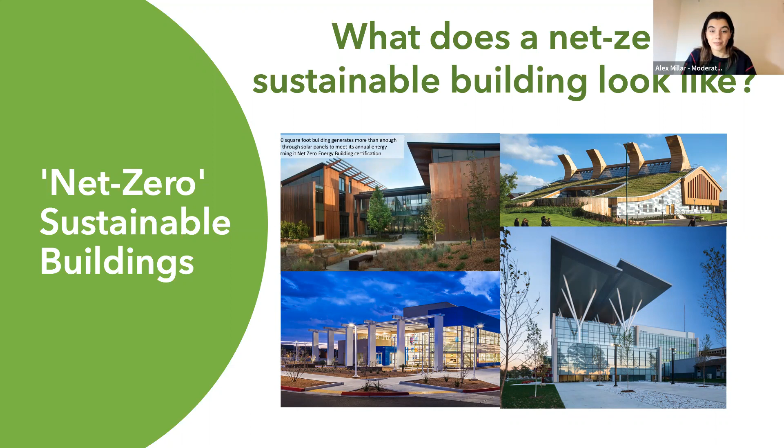But by choosing to demolish some of our older buildings on the grounds that they no longer meet our current needs, we are failing to embed more circular practices, which could reduce the amount of waste generated through the effective reuse or recycling of existing building materials.

In making such choices, we should consider the amount of embodied energy already contained within these existing structures and the historic emissions already released through the process of designing, building, restoring, and maintaining those assets. We need to think about the energy consumed as new materials are manufactured, distributed, sold, transported, and then assembled.

Can they be sourced locally, regionally, provincially? Can they be sustainably sourced? Some developers are taking this to the next level by choosing to deconstruct rather than demolish existing buildings.

This can involve taking buildings apart piece by piece and avoiding damage by carefully extracting what is required. By taking such an approach, we can not only save on purchasing new materials, but positively reduce the amount of materials, noise, nuisance, and dust associated with more traditional demolition and reconstruction methods.

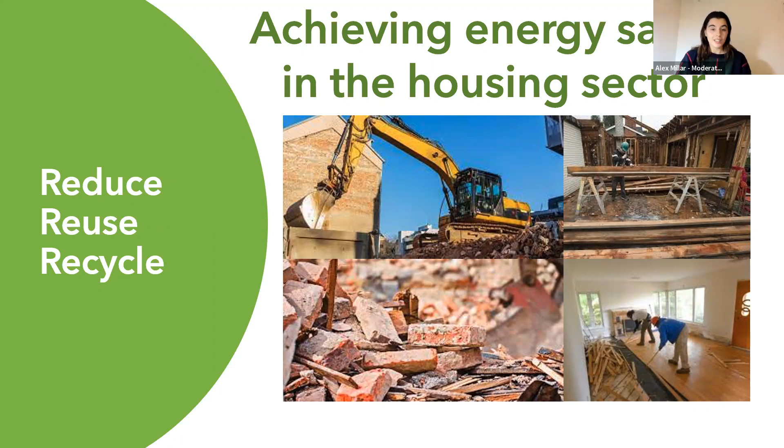As we continue our conversations on how to achieve that goal of net zero emissions by 2050, we will also need to determine what actions we can all take in our own homes to increase energy efficiencies. And that's kind of where Rethink Green can help.

As mentioned earlier, Rethink Green will soon be launching our new Northern Home Energy Assessments program. We recently hired a new staff member who's currently training as a registered energy advisor to provide home energy assessments in Greater Sudbury, North Bay, and beyond. The training process is extensive, but our energy advisor will soon be ready to deliver home energy assessments to EnerGuide standards, allowing households registered in the program to potentially access government grants, incentives, and other rebates.

These can be used for a range of purposes, including renovations, improved home energy efficiencies, and ensuring that our older buildings stay resilient to the effects of climate change.

The process for applicants will include getting registered with Natural Resources Canada, then booking and receiving your initial assessment. Our energy advisor will come to your house and determine the exact amount of energy your home is consuming. This is commonly referred to as a baseline assessment.

The energy advisor will then draft up a report outlining your home's current energy use and make a list of recommendations for improvements. They will also provide estimates for how impactful the recommended improvements will be, in the form of percentages.

The homeowner will then complete the renovations, and they must make sure that they keep all those receipts, because they're going to come in handy.

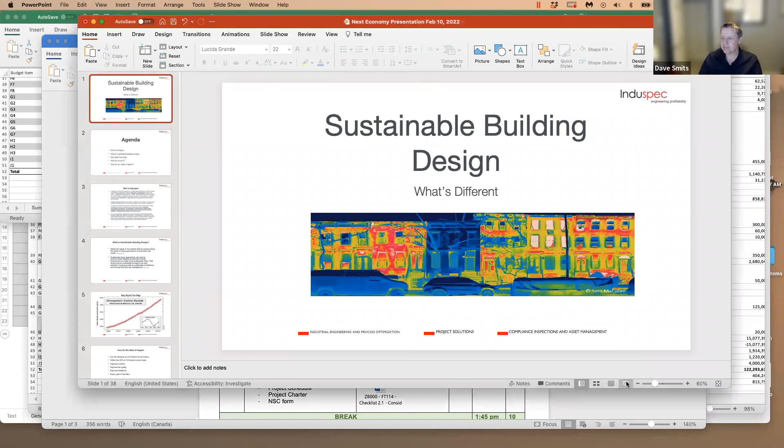Okay, we're all set. Thank you so much for that introduction, and I really appreciate your reference to existing buildings. This first slide: sustainable building design, what's different?

So when you look at this picture, this is a thermographic image of 6 buildings, brownstones in New York City. The one that seems darker than all of the rest is one that has had a deep energy efficient retrofit completed on it a few years ago. The ones where you see all the yellows and reds, that's heat loss, where the heat is being wasted in those buildings. The building that's blue shows how, through the renovation activity and improvements made, much of an improvement could be achieved. Visuals are often very powerful in explaining what can be accomplished. That's what's different when we talk about improving buildings.

In my presentation, I'm going to talk a fair bit about new construction, but a lot of what I'm talking about is absolutely applicable to renovation projects as well. Passive House has a deep energy retrofit, the EnerPHit program, targeted at renovations, because we cannot replace all the buildings we currently have, nor should we, for the reasons Alex already talked about.

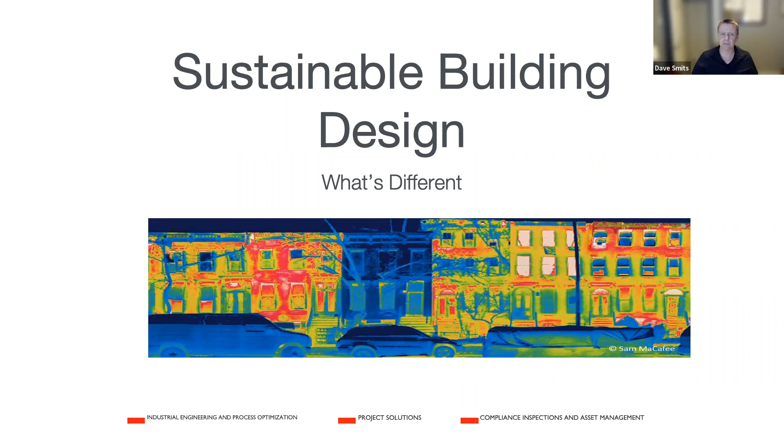So quickly, an agenda: who's Induspec? I'm going to do a little plug for the company at the beginning. What is sustainable building design? Just a couple of definitions - why we should build this way when building new, but also why we should renovate this way, which I think is completely applicable. How do we do it? What's the approach, how do we make it happen? That's another piece of the puzzle.

And at the end I will talk about the embodied carbon issue, because it's not just about using less energy in the buildings we either have now or have in the future, but we also have to think about what we're building these buildings out of. As Alex said, we've got to reuse the buildings we already have to the greatest extent possible, because the production of building materials is a large source of carbon, but I will get into that a little later as well.

So just Induspec, we've been around since 2010. I've been with the organization 5 years now. Our motto is sort of boots on the ground. Myself and the other engineers in our office like to not only provide the analysis and reports for our customers, but we actually want to see those reports implemented and ensure their projects are completed. So we spend a fair bit of time providing on-site support to our customers. We try to distinguish ourselves by that hands-on approach and on-site approach.

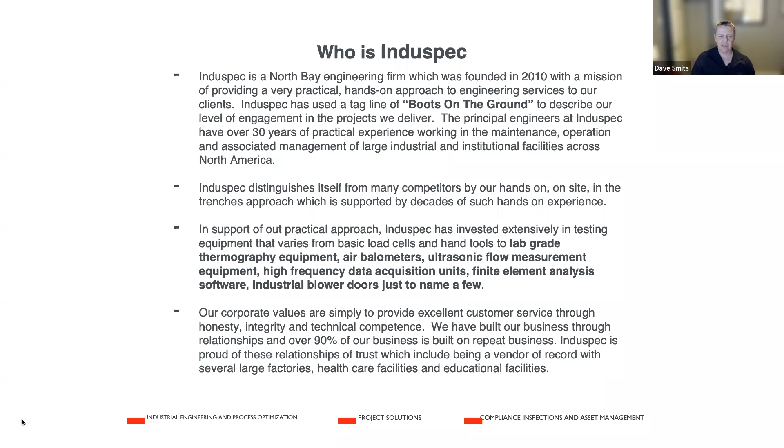So we have that kind of equipment and use it to help solve problems for our customers. A big chunk of our work is based on repeat business, so we thankfully can develop relationships with our customers and get to continue serving them going forward.

Sustainable building design, I pulled a couple definitions. It meets the needs of the present without compromising the ability of future generations to meet their own needs. To me, that's a pretty fundamental definition of sustainability. Sustainable living approaches can reduce environmental impacts by altering the built environment to create more sustainable cities. That would include sustainable transport, zero emissions housing, as well as sustainable architecture and circular flow land use management.

That's kind of a fancy word for what Rod Bills was presenting on a few weeks ago in terms of how do you revitalize your cities, how do you create healthy cities, and what does that look like, as opposed to continually expanding and building new subdivisions. How do you do effective infill and really create vibrant communities with walkable spaces and those sorts of amenities?

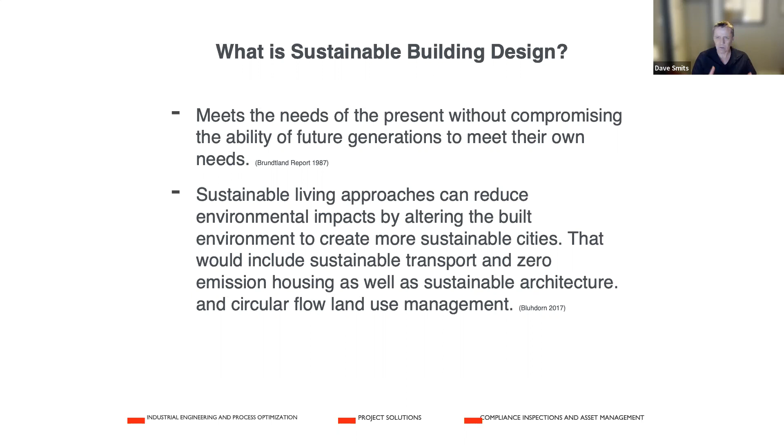So over the last 3 weeks leading up till today, I think many of the issues that support sustainability we've already heard about, with our kickoff presentation providing a broad view of what actions various municipalities are taking to move forward, Rod's presentation on how to make a vibrant city and how to help it be sustainable, and then last week looking at transportation options and opportunities. I think we've been building on this theme all the way through the speaker series.

I just pulled some stats in preparing for the presentation, from the period of 1990 through 2017, and this is from NRCan, so a reputable source, energy efficiency in residential buildings in Canada improved by 30%. So 27 years, 30%, a little bit over 1% a year. I'm not sure if anybody other than me thinks that at that rate, we're not going to solve our problem and be able to hit 1.5 degrees if we're going at 1% a year in terms of improvements. It just doesn't seem at a rate that's anywhere near aggressive enough.

Is that really a path to sustainability? I think that's why things like Passive House and these deep retrofits and net zero have become part of the conversations we need to have, because our current rate of performance improvement is inadequate. It's not going to do it.

And I guess today in Ontario particularly, maybe not in Toronto because some of the standards are different, but in much of Ontario, you go to build a new home and you ask the home builder, well, how much is it going to cost me to heat it? Or what my utility bills will be?

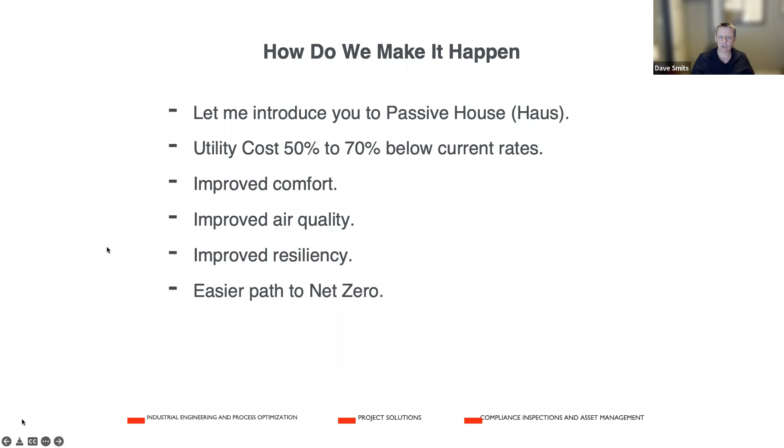And then it follows with testing during construction. As you build this building, you actually test it to confirm that it's going to perform the way you expect, and you're going to get those advantages in terms of comfort and air quality reliably. It also makes the path to net zero much easier, because if we reduce the amount of energy these buildings need by 70 or 80%, think about how small a solar system you need to actually be net zero at that point. So it all lends itself towards sustainability.

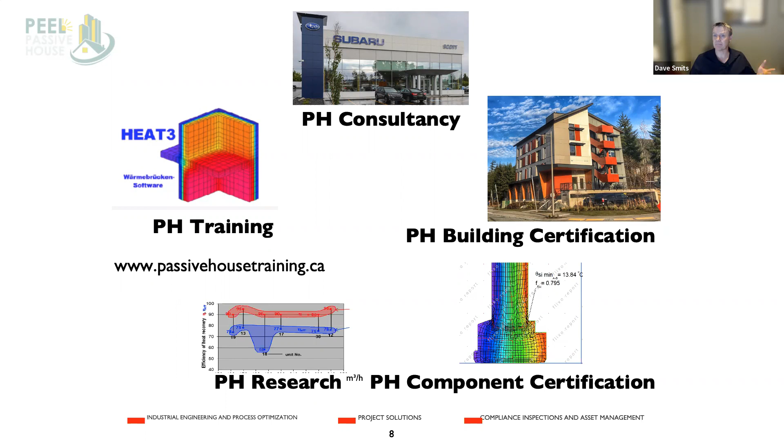This is some of what he does: the Passive House Consultancy, he does training, certification, research. He's probably one of the top minds in the province, if not the country, as it relates to Passive House. The one picture here above Passive House Consultancy, he's actually certified a Subaru dealership in Alberta to Passive House standards. House, in German, means building, it's not a house. So this isn't just about residential construction, this is about all types of construction. He's actually built and certified a car dealership, just to put it into context.

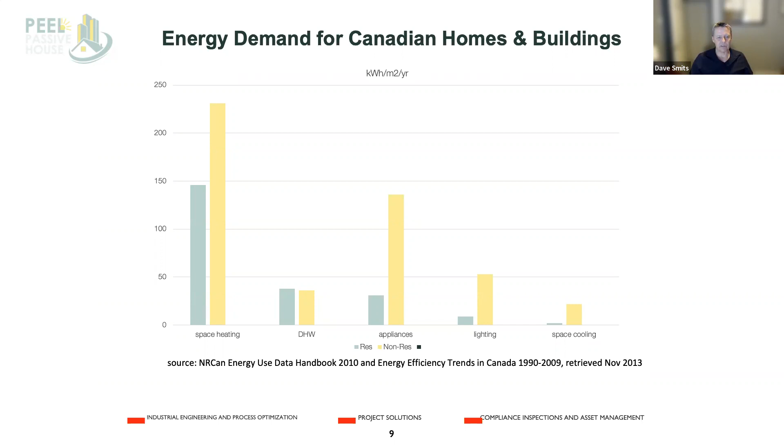So again, energy demand for Canadian homes and buildings, just touching on this again. This is some data that goes back to 2013. It hasn't improved dramatically, as I said earlier, 1% a year, so the data isn't going to be much different on this slide deck. But you can see that with Passive House, when you add in where we'd be performing in comparison to these other bars, the space heating bar chart is dramatic.

This kind of improvement now makes net zero so much easier to accomplish. Domestic hot water, there are improvements because we think more carefully about the hot water system and design it more efficiently. Appliances, we're selecting better quality, Energy Star certified appliances. Lighting, again, optimizing lighting using better techniques, and space cooling is also done more efficiently. But when you think about Canada and energy consumption, this is the one I hope catches your attention.

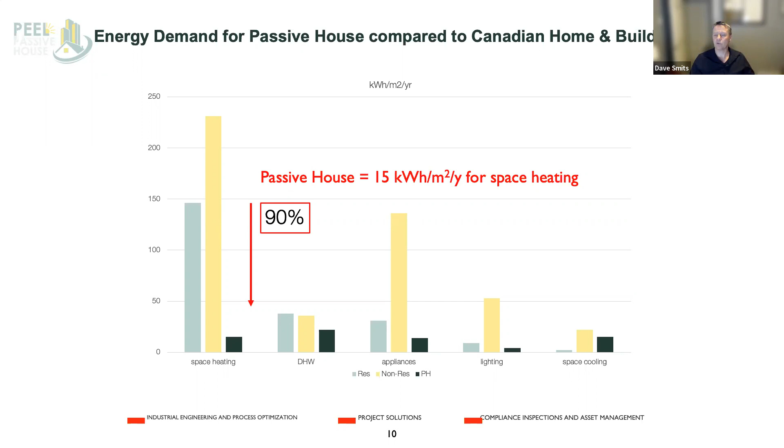That amount of decline, 15 kilowatt hours per meter squared per year, that's the target for Passive House. So to be certified in a certified project, you will be at or below that target. That's a 90% reduction. I've talked 50 to 70 because I like to be conservative, but many projects are accomplishing 90% over building code sort of buildings.

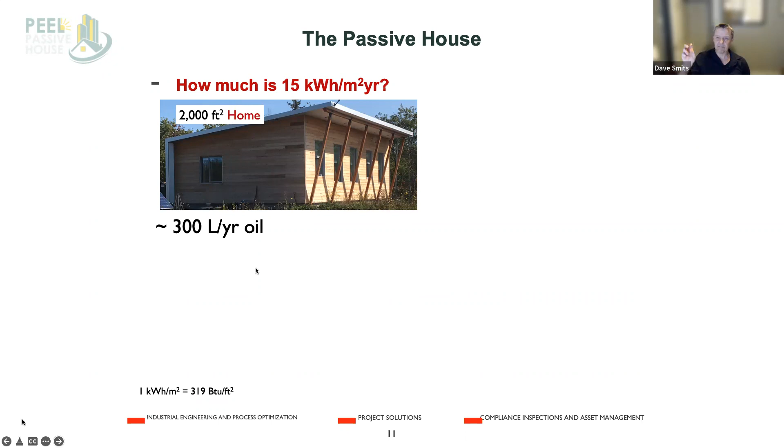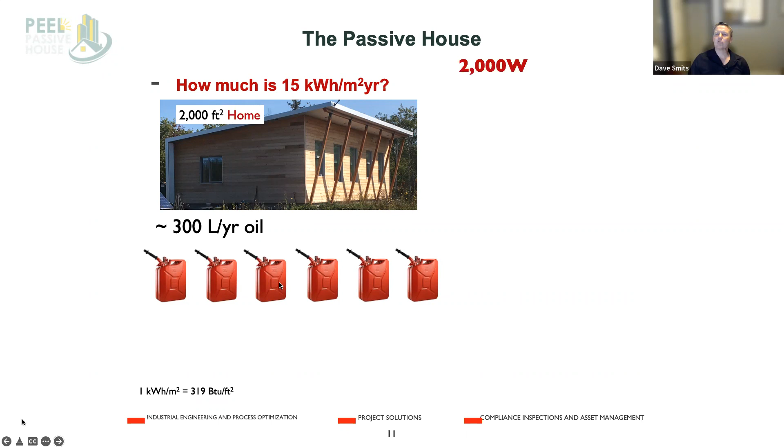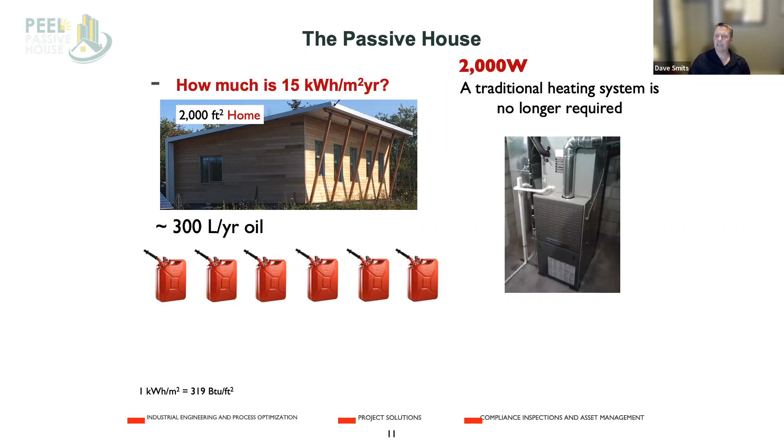So we're talking 2,000 watts now in a Passive House home of similar size. A traditional heating system is no longer required - you're not going to put a traditional furnace in a Passive House, it's not necessary, it's overkill. You could basically heat it with a big hair dryer. With effective design, really thorough planning, thinking about where your sun is - and I'll talk more about those considerations later - this is the kind of performance improvement we're talking about. I think it's pretty compelling that this is achievable and is being achieved in many parts of the world, and here in Canada now in a number of projects, which is great.

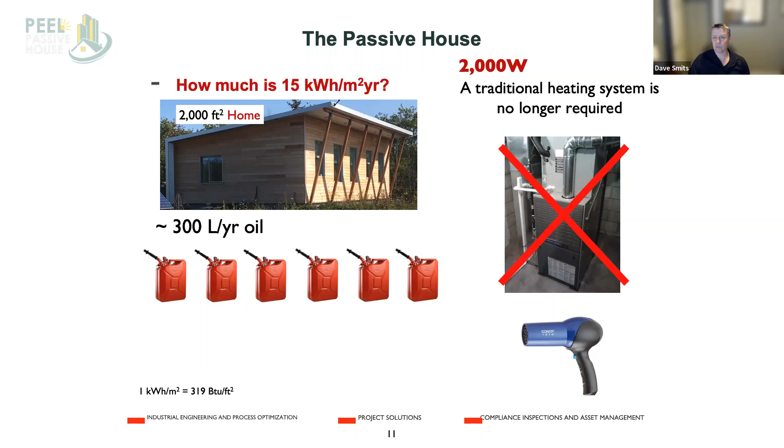We want to avoid thermal bridges. A thermal bridge is an area in your building where you end up with less insulation in a specific spot because of how the building is constructed - where, let's say, you've got a 2x6 constructed house today, but at the corners where the 2x6s meet you can't put insulation, or very little. Instead of an R24 in that corner, you might have an R5. Well, that corner is a thermal bridge. There are thermal bridges around your windows, and typically where your wall meets your roof.

The design practice with Passive House is we eliminate those thermal bridges to the greatest degree possible through effective planning. We pick good windows that have high performing glass and high performing frames, and we ensure that we've got an airtight envelope. Then last, we make sure that you can still breathe in this house, because if we've made it this tight, we've just moved you into a sealed water bottle, and without giving that building some air, it's not going to be very comfortable.

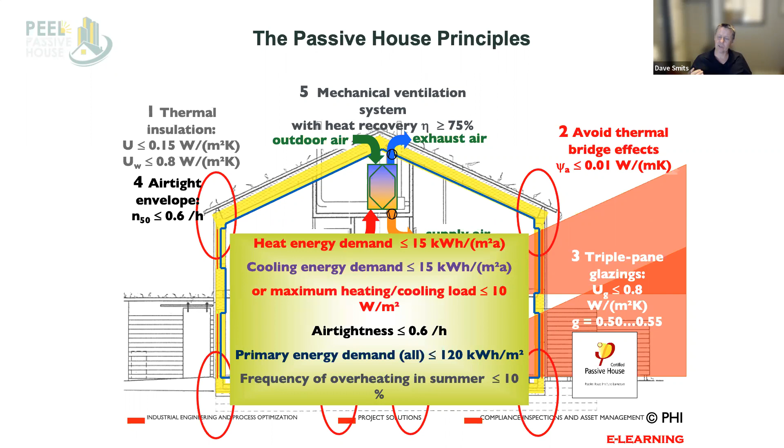Primary energy demand, all sources, has to be below a certain level - I'm not going to spend too much time on the technical stuff. And frequency of overheating in the summer has got to be less than 10% of the time. Why this is an issue: when you've made it this tight, if you get solar gain in the summer and you're not thinking about how you're shading your building, you can run into a situation where overheating becomes a problem. So you'll want to make sure you've taken that into account in your design and eliminate that risk from an overheating perspective.

So what's actually happening when we do this? In the 19th century, we built buildings and we put large furnaces in them, boilers, big stoves, whatever the case may be.

We went around with sweaters on, and that's sort of what our buildings were. The 20th century came along and we decided we could fix it all with technology. So we're going to have building automation systems, really fancy mechanical systems, really fancy heating systems. We're going to do all kinds of stuff. And that's what we did in the 20th century.

And we all see that at 1% a year, those approaches have been pretty much ineffective. It's been nominal improvement. In the 21st century, in a passive house, we actually spend the time paying attention to the building envelope itself, that part of the building that is so fundamental, we get it right. And then what happens is we actually have very simple and minimal mechanical systems, but we have a far superior building in terms of its comfort and its resiliency over time.

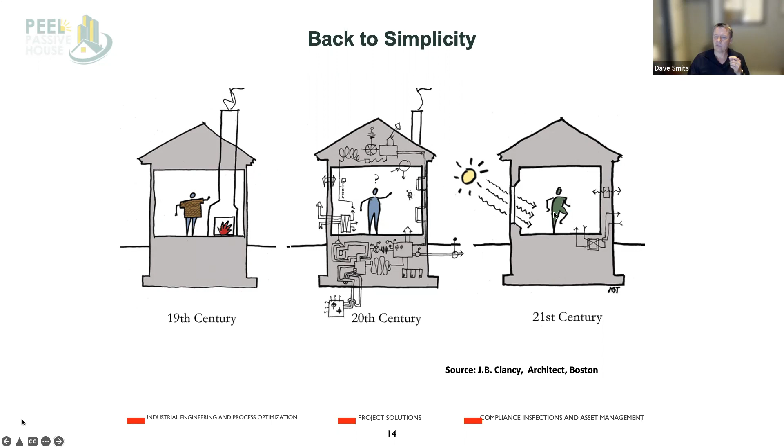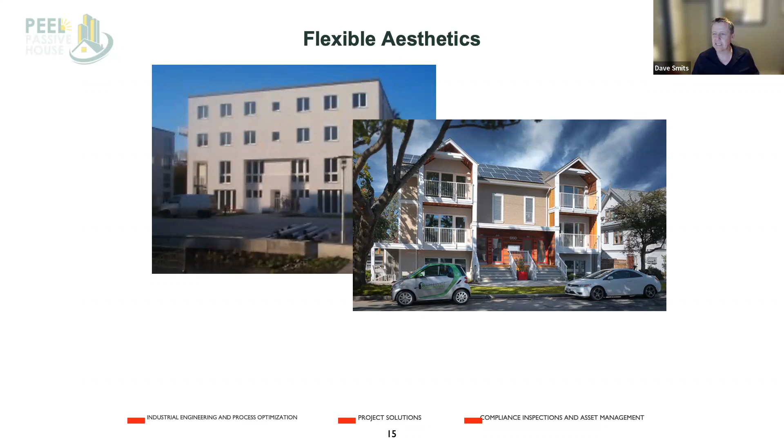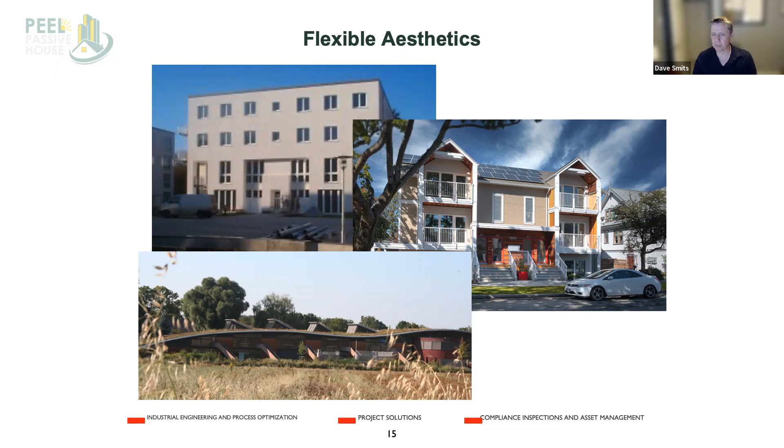Again, a little bit more on why passive house. So, superior indoor environment: air, thermal, and acoustic.

We know how much air we're getting because we're controlling the airflow, and we know what quality of air because we filter that air. So we've got a certainty around air quality that you don't have in your house today if all you're counting on is what leaks through the walls and windows in your building.

Thermally, the temperature in these buildings is very constant from room to room. It would be almost the same across any room in the building. And I'll talk a little bit more about not just the same from room to room, but in a room, also the same even as you get close to the outdoors and to the glass.

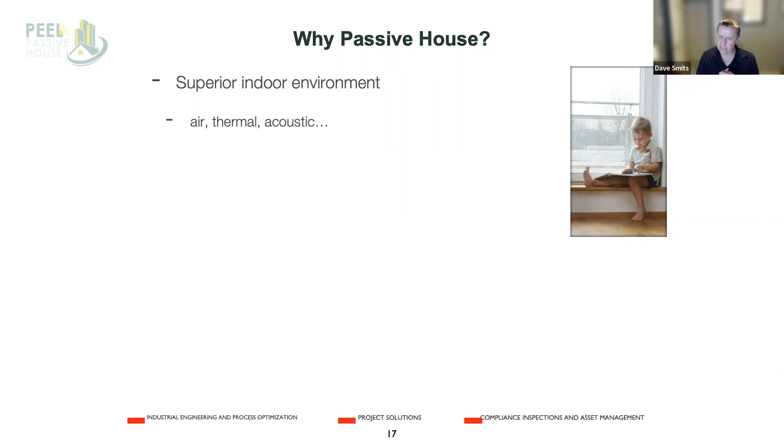Acoustically, these buildings tend to be extremely quiet because they are so well insulated and their windows are such good quality that if you're living in a busy neighborhood with lots of outdoor noise, the inside of your building is very, very quiet.

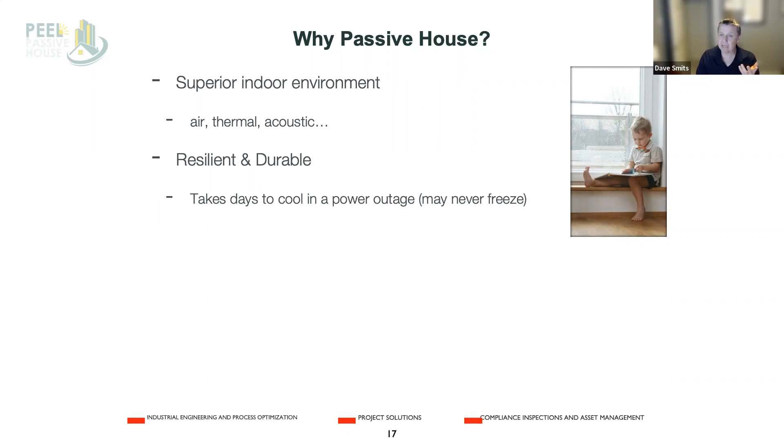Resilient and durable, I'm going to talk about a bit more. I've got some slides that talk about timeframes in terms of how long they'll survive with power out before you get down to temperatures that could be a problem. Depending on where you are, it can take days to cool in a power outage, and it may never freeze just because of the nature of how it's built.

25 years, this has been around for a long time. In other parts of the world it's been certainly accepted. Some countries have made this their building code in terms of energy. We haven't gotten that far yet in North America because energy has traditionally been cheap, but obviously that's changing.

It's accepted and sought by occupants in many parts of the world. It delivers true greenhouse gas emission reductions, and it's backed by robust third-party quality assurance processes. So the certification of these buildings, if people take it to that extent, gives you that assurance that the building will perform the way you expect it to perform. That's the advantage of certification.

It works in any and every naturally inhabited climate. So this isn't just for warm or moderate climates or super cold climates. Based on the design principles, it can be made to work anywhere in the world, and it does today.

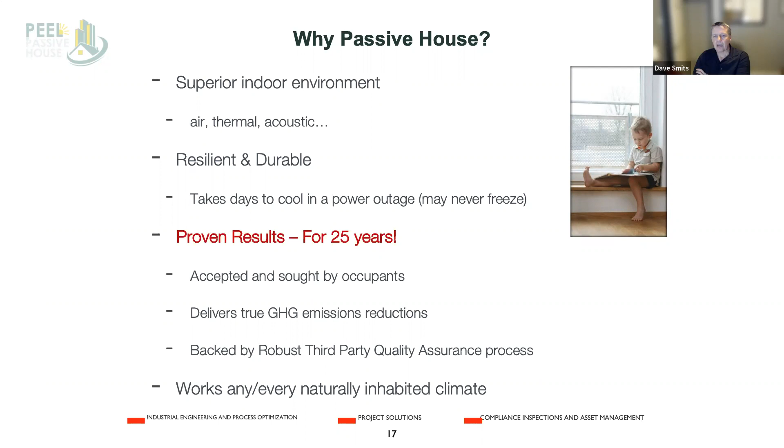I'm going to talk a little bit more about comfort. One of the issues, I think—I live in an early 1960s house here in the city of North Bay, and I've done lots of renovations over the years, but I can tell you when it was 30 below a few weeks ago, if you go and stand close to your window, you often will find it quite chilly, because the actual temperature in front of that window is quite a bit different than it is in the balance of the room, often 4 or 5 degrees different.

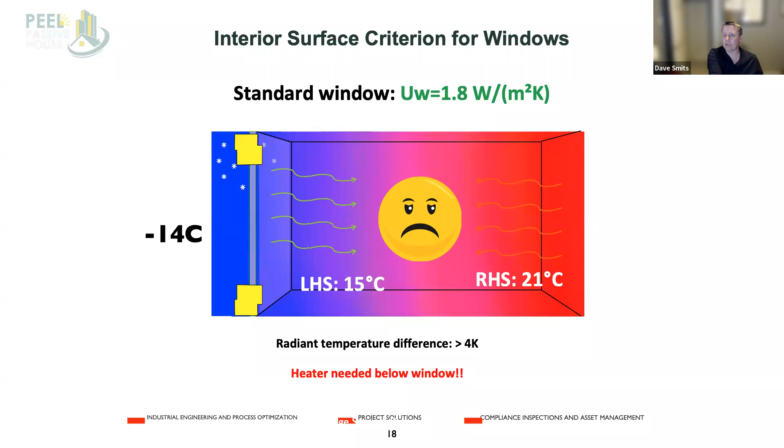So if you've got a chair close to the window on those coldest nights, you're typically not sitting there, or you're drawing some curtains, or doing something to take the chill off that window. Often there's got to be a heater in front of the window to take that chill off. So in Canada, where do we put our vents from a forced air system, or our radiators if it's a baseboard? We put it in front of the window. Why? Because the window's cold. That's why it's where it is.

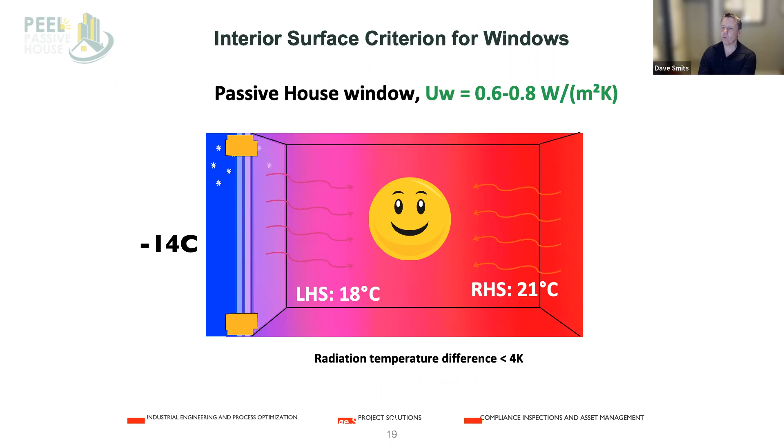In a passive house, we cut that temperature differential by 3-4 degrees by picking a better window. So all of a sudden you don't have that same discomfort, you don't have that same need, and therefore you don't need to put the heater below the window. We actually looked at this. We were building a new hospital here in North Bay 15 years ago to see if we couldn't find better quality windows to avoid the perimeter heating system. At that time, we couldn't get reliable window data to give us the confidence that we could do this. But that was the principle - better windows meant we didn't need the radiant heaters in front of the windows. Unfortunately, we couldn't do that then.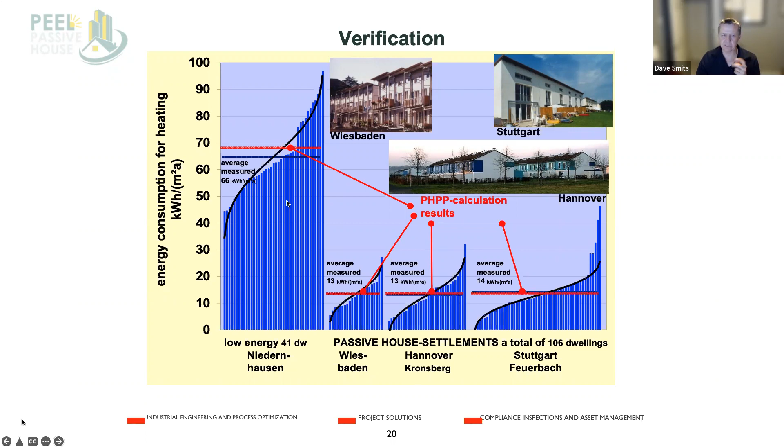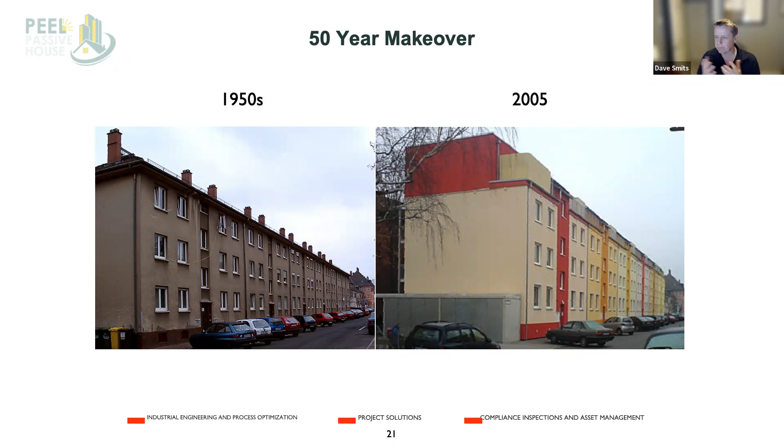Again, performance - not just new builds. This is a retrofit. You've got a block of buildings from the 50s on one side, after it was fully renovated, with a new exterior and other upgrades completed, on the right. Here's the before and after thermography images. The one on the left shows all the heat coming out of various locations in that building envelope. The one on the right shows that has been, for the most part, completely eliminated. The windows will always be where you still see some heat loss, but windows are an incredibly important part of any building, so it's a matter of managing and minimizing that by selecting very good windows.

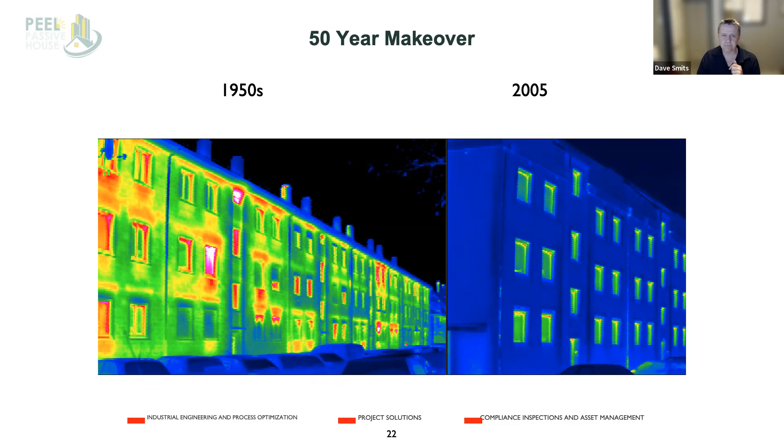Resiliency, just to touch back on this - this is analysis from Toronto's Zero Emissions Buildings Framework. They did some modeling to say, as they move through various tiers requiring better and better efficiency over time, what would happen in a power-off winter temperature in Toronto. Toronto's not North Bay, it's typically more moderate, but you can see the difference as time goes on and how much longer you can remain in that building as the envelope improves. When you get to tier 4, close to where Passive House is, in a high rise building, after 2 weeks you're still between 15 and 20 degrees Celsius. You're never going to run into freezing in that unit - it's not going to happen. So the resiliency in terms of shelter in place is built into the building once you improve the envelope to the degree I'm talking about.

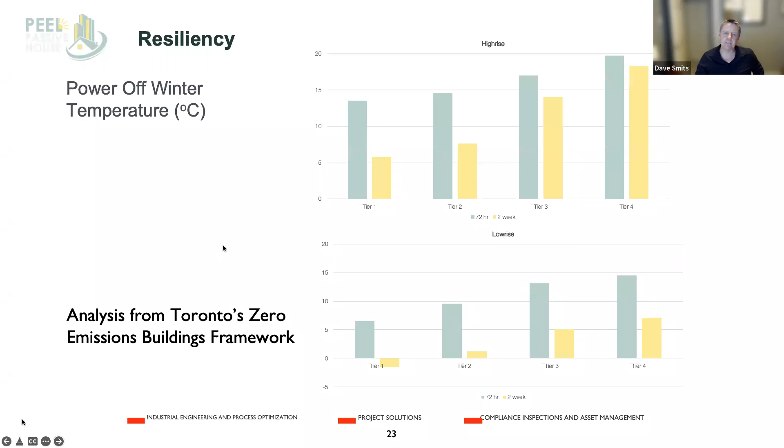So, Passive House delivering on promises since 1991 - that's some of the earliest buildings built to this standard. So possibility and integrity are some of the things I've touched on so far. But I'm going to go a little further because I want to show some examples. 40 countries at this point - what other building standard or rating system has such reach?

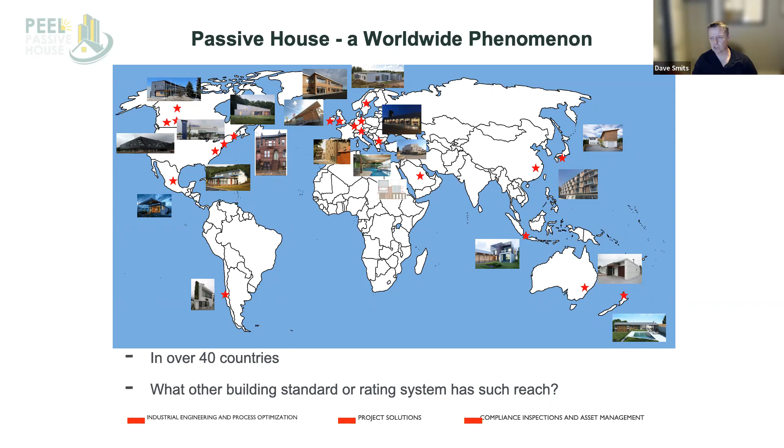Not many, not any that I certainly know of. So we're talking around the world, from China to Australia to North America, South America. It is starting to be more and more embraced as what we need to do in the future to accomplish the goals that we have in terms of sustainability.

Here in Canada, a number of different projects, everything from condo towers to EMS buildings, tower retrofits. The city of Hamilton has done a project where they took a derelict high-rise building and did a deep energy retrofit on it, putting that building back into service and achieving performance improvements in the range of 70% or more over what the building was originally. That's the Ken Soble project in Hamilton, completed last year. Now work is happening to see where else they can do those kinds of deep energy retrofits.

Car dealerships, as I said, so it's a full range of buildings. This isn't just about houses. This is about virtually any building that we build.

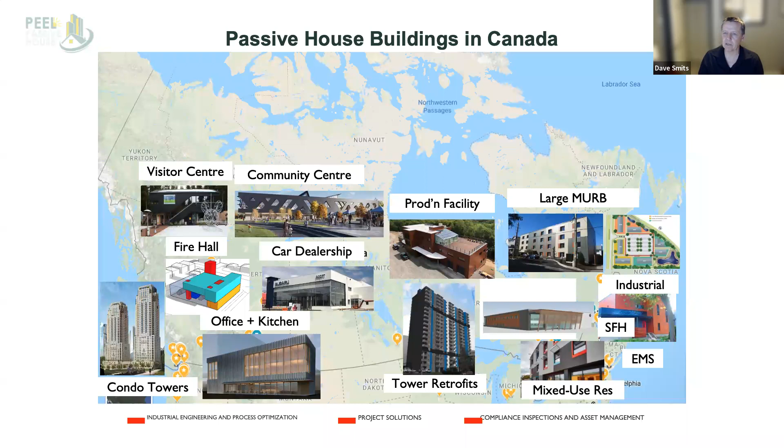Economics - people often think it's going to cost a whole lot more money to build buildings like this. For countries that have been in this now for a while, there is that initial increase in cost as the industry comes to terms with the different construction process. But what's now happening is those same countries have looked at various methods to improve construction processes, including prefabricated wall systems and prefabricated mechanical systems, so that construction can happen so much more quickly that in places like Belgium, you've seen cost actually be less, 10% less than conventional construction was before they made the switch to passive house.

90% sold in 6 weeks, sold at the same price as a standard building. So they didn't have any premium that they needed to put on those buildings when they sold them.

Affordable housing in the UK: 10 to 15% higher rents, lower rent arrears and turnover, because it's very, very cost effective to live in these buildings. In Vancouver, they're actually experiencing premiums that people are willing to pay on townhomes that have been certified to passive house standards, because the lower operating costs provide an advantage over time. So there's actually an inherent value increase that you're seeing in these high performance buildings.

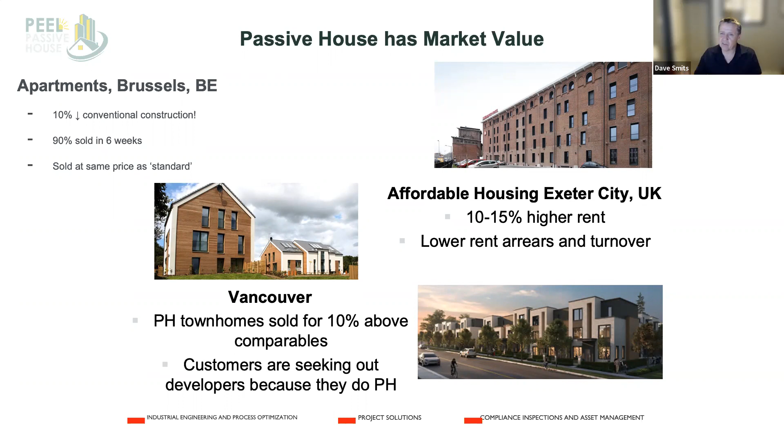Pennsylvania has done a number of geared-to-income housing projects now with passive house as the standard. Their initial projects were coming in 3 to 5% above sort of code-built buildings, and the last several projects have come in 3 to 5% below those code-built buildings. So as the trades get used to what it means to build these buildings, and better planning is built in, where the savings come in is you're avoiding these elaborate, complicated mechanical systems, and those savings help offset the majority of the costs that you're seeing in the envelope. In many cases, they're actually cheaper than a code-built building.

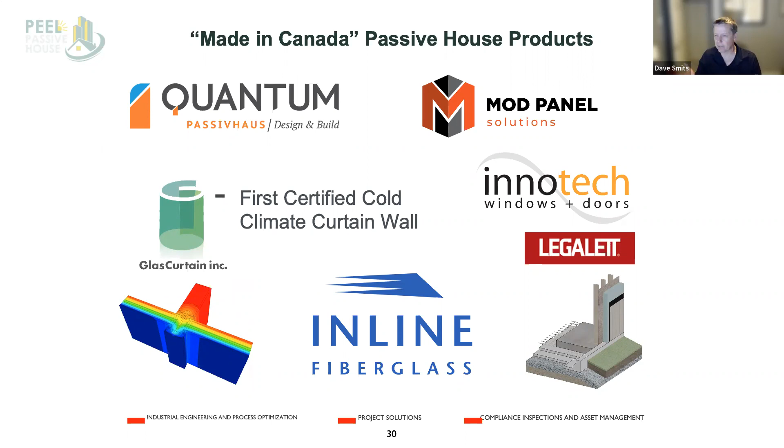In Canada, the good news is we are getting some made-in-Canada passive house products. These are just a few companies that are out there now that have embraced this. Quantum Passivhaus is right here in the province of Ontario, and they've got prefabricated wall systems that are certified to the passive house standard, and that can be shipped to your construction site, so that assembly on site often takes somewhere in the range of 1 week to 2 weeks, and your building is enclosed and the roof's on, and you're finishing the inside of the house once these panels arrive on site and your foundation has been pre-poured. So those are some of the advantages in our Canadian climate around speed of construction, and obviously superior performance.

Political developments. Good news is there's leaders everywhere, but in this case, City of Vancouver is moving aggressively. The BC Energy Step Code has started to make it very clear to builders in BC that by 2030, or 2032, they intend to be essentially at passive house standard in terms of energy consumption, 15 kilowatt hours per meter squared per year. So they've made it very clear to the industry that we've got to get this figured out.

Also in BC, they are working through aggressively getting rid of gas, essentially. So electrification of the buildings in BC is also happening on essentially that timeline. The intention is to have no heating done with gas or oil past a certain date, and that date is actually only, I think, a few years away now, so it's coming up quite quickly. Toronto Green Building Standard, same thing - by the time we get to tier 3 or 4 in 2030, they'll be at this performance standard.

The National Energy Code is working in this direction, but it gets accepted at different rates by different provinces. Ontario hasn't taken as decisive a position in terms of moving in this direction. And ASHRAE is working aggressively on matching their standards to the standards in Passive House.

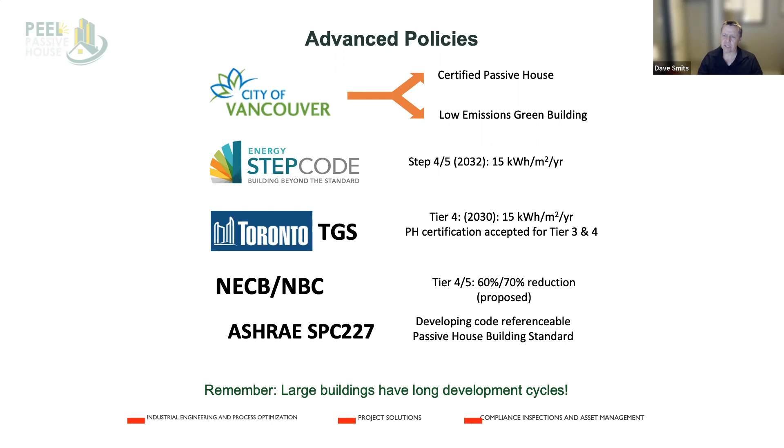York Region—police stations, EMS, maintenance yards—they're planning to have Passive House on public buildings starting in 2025. They're just setting it as a standard, that's what they're going to do as a municipality. City Housing Hamilton, I already talked about the Ken Sobel Tower—they're doing a number of Passive House projects and will be doing more.

Ottawa Community Housing has already built a Passive House project—a social housing development with smaller units—and the annual heating cost for these units was $50 a year. I just want to let that sink in for a second. $50 per year, that's what we're talking about in terms of annual heating cost. These projects are here today, they're up and running, they exist. This isn't just a future-looking thing, this is now.

Summary outlook for Passive House: we're seeing massive growth and interest with active projects. I'm going to talk at the end about some different links you can go to if you're interested in reading more. There are some really good communities that have developed over the last three years that want to share, promote, and support this type of building practice. I'll share that at the end.

It's a growing market for forward-thinking companies to capture, but not only companies—municipalities too. Like City of Ottawa and many other cities, this is what they're doing with their social housing stock. They're setting the standard, saying we're going to do deep energy retrofits and build to this standard.

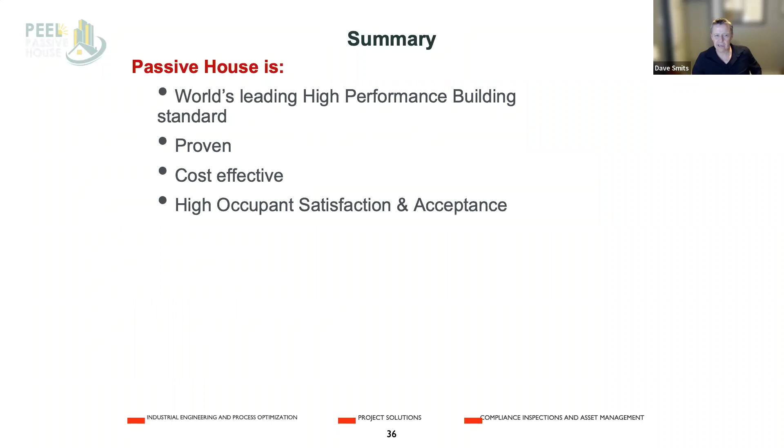So in summary: a world-leading high performance building standard, proven, cost effective, with high occupant satisfaction and acceptance, driving innovation, future-proof, climate change resilient, and a foundation for net zero energy homes and buildings. When you've built it like this, putting solar panels on that building is a very cost-effective solution, because you just don't need very many of them.

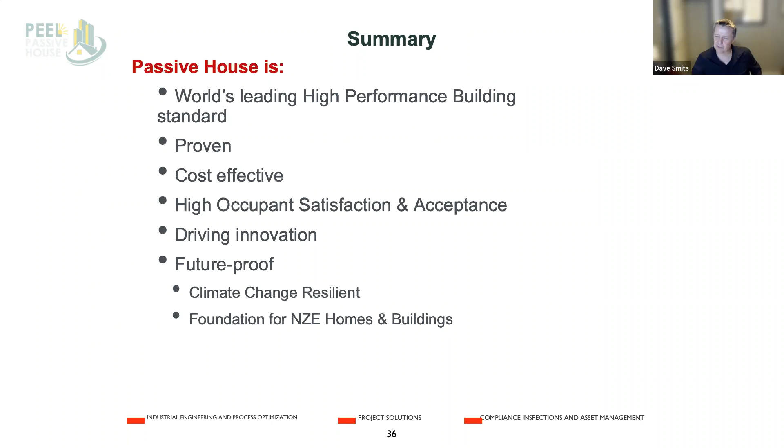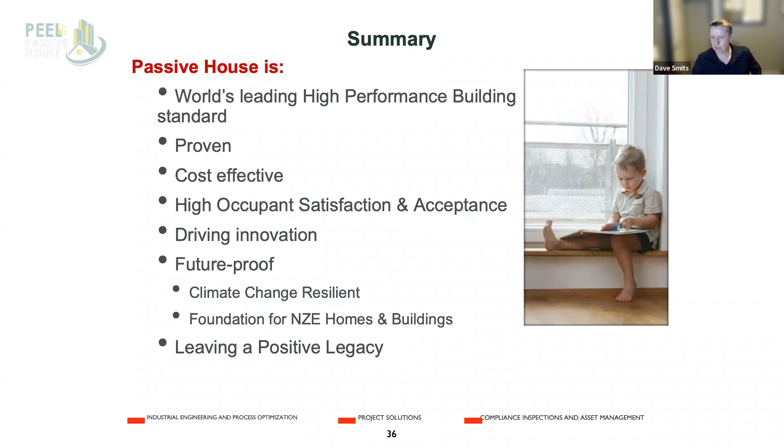And then leaving a positive legacy. Who's this for? This is for our kids, our grandkids, and the generations that come after us. That's really what we have to continue to remind ourselves of.

I want to touch briefly on embodied carbon, and Alex talked about a bunch of this at the beginning, so she did a great job covering the major issues. Construction material choices are an important consideration.

We can't afford to, and nor should we, rip down all the buildings we already have. That's not a path to sustainability. Between now and 2030, when we've got to hit this 1.5 degree target, what's probably more important than how much energy our buildings are using is how much embodied carbon is in the materials we're producing to create those buildings.

To hit the 2030 1.5 target, a lot of the experts I'm reading say if we don't deal with the embodied carbon issue, the operating carbon issue I've already talked about is not going to solve our problem. It's not just about operating carbon. We have to consider embodied carbon.

It's critical. So construction material choices are critical. Building life cycle considerations are critical. We don't just tear them down. As Alex said, if you pick the right building materials like prefabricated wall systems and other components, in the future you can deconstruct that building and reuse many of those components. But you've got to be thoughtful about how you design and build those buildings.

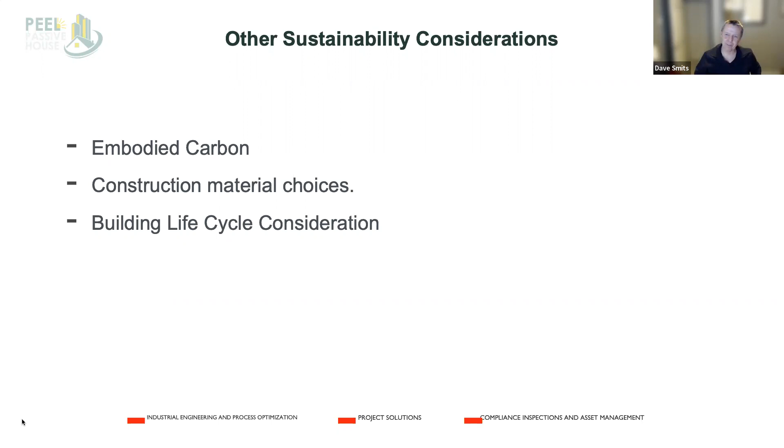So to wrap up, I've left some stuff on the slide deck you can look at your leisure. These are just some references I use on a regular basis if you want to read and learn more. Once you get down this rabbit hole, you can spend an awful lot of time here—take it from me. So that's it.

Thanks so much, Dave. That was fascinating. That was awesome, really fascinating. Passive housing is definitely a newer kind of concept for me.

I haven't known about it for very long, but it was back in the fall at our business forum that I first had my eyes opened to passive housing a little bit, because one of our Green Economy North members, Judy Sumner, told us all about these nifty little projects she had going on in her house. She talked about the passive benefits she had, like comforts based on where her windows were and where she planted her trees, and what that did for the temperature of her house. She's a chemistry teacher by training, so it really translated well. That was really great.

So thanks again, Dave, that was awesome.

I did get a question in the chat for you, wondering what your thoughts are on reestablishing the home energy rating and disclosure program that was canceled back in 2018.